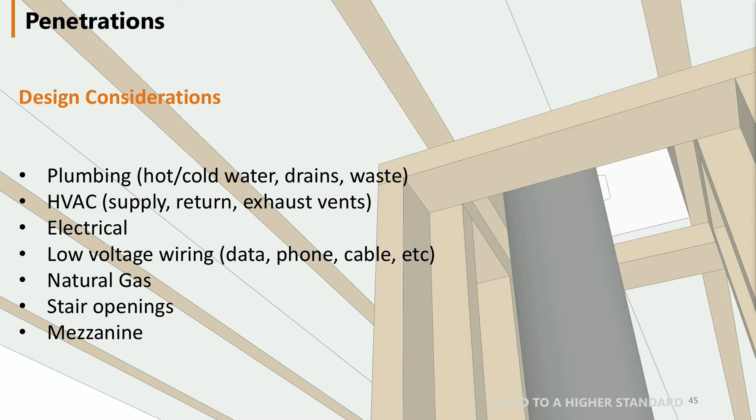The principle applies here. Some pre-planning is required to make sure all the penetrations are in the correct location, the correct size, and you have enough of them to run whatever you will need to run once installing HVAC, plumbing, electrical, etc. These images show the ideal location for small penetrations through Amdeck.

You can see that they fully clear the concrete joists, the metal or wood joists. This is what you should strive for. Here you see less than ideal locations, but still acceptable. You can place the sleeves right up against the concrete joists as long as they don't interfere with the joist cross-sectional core by reducing its thickness or interfering with the rebar placement.

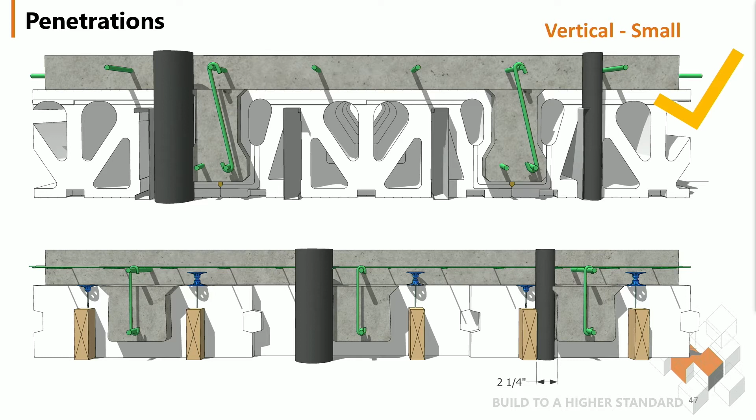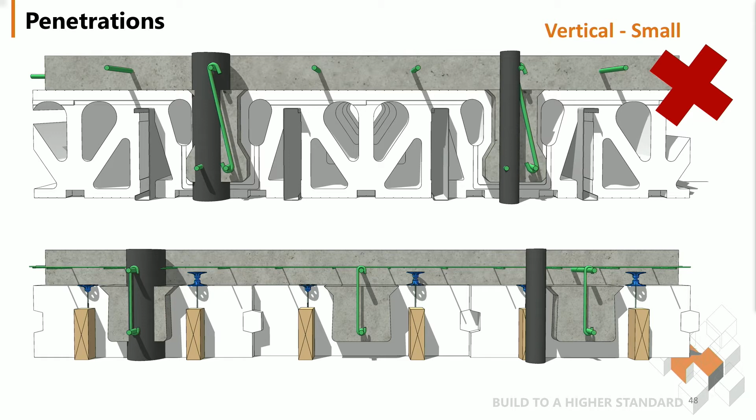The wood or metal joists can be cut substantially, with the caveat that they would need additional support in these locations. This slide shows what not to do with penetrations. It is best to avoid these conditions. In theory, this can be done, but a structural engineer would need to approve or provide instruction for these specific locations. It should be easy to avoid these types of situations with small penetrations.

This is not applicable to most single-family residential homes and is targeted towards multi-unit residential and commercial construction. For those sectors, fire-resistant assemblies are part of the code requirements, and any penetration must be properly sealed. The main aspect of a fire stop detail is to ensure to have fire stop material. Many times it would be a sleeve of mineral wool insulation and a smoke seal at the top. This ensures that the entire assembly is rated for the particular fire-resistant rating.

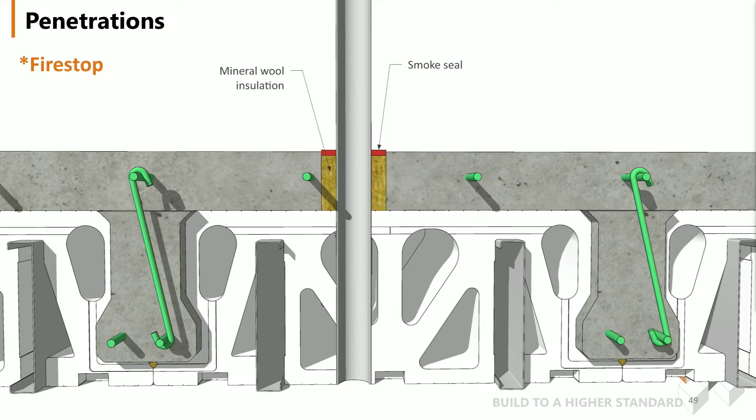Medium-sized openings can be accommodated in between the metal joists only. Their width is limited to 14 inches for the Amdeck Pro and might require additional rebar around the opening depending on its size. Amdeck Eco allows for a 10.5 inch wide opening between its joists. And again, it might require additional rebar around the opening depending on its size.

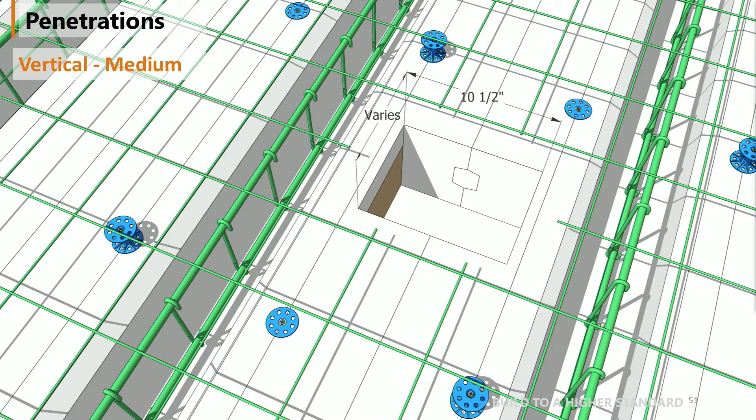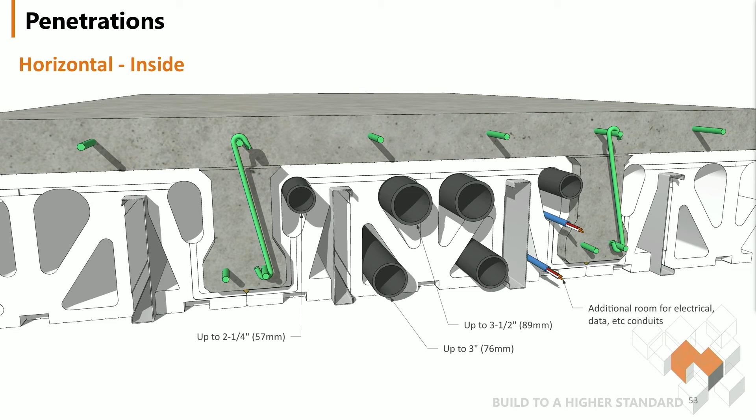When looking to run plumbing or electrical horizontally, Amdeck Pro has openings that allow up to a 3.5 inch diameter pipe to fit. The smaller openings in the form can be used for wiring. Amdeck Eco is solid and does not have the same kind of functionality and would require the pipes and/or electricals to be partially buried in the foam or run fully underneath it.

It is possible to cut some of the foam and partially embed plumbing pipes into it. This is especially true when trying to run something perpendicular to the wood joists. When running on the underside of Amdeck, it is important not to go deeper than 2 inches since that's when the concrete joist starts and it should not be compromised. The top of the Amdeck forms can be trimmed away with a hot knife to allow the pipes to be inset.

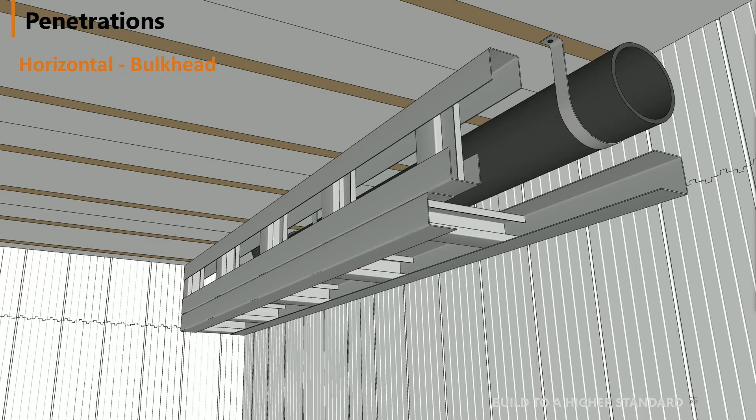The most ideal configuration for running utilities with Amdeck is to use bulkheads or, in the case of commercial and institutional construction, drop ceilings. This methodology allows the most flexibility in maintaining proper slopes for pipes as well as their correct location in the floor above without having the need to carve out foam, spray foam parts back in place, etc.